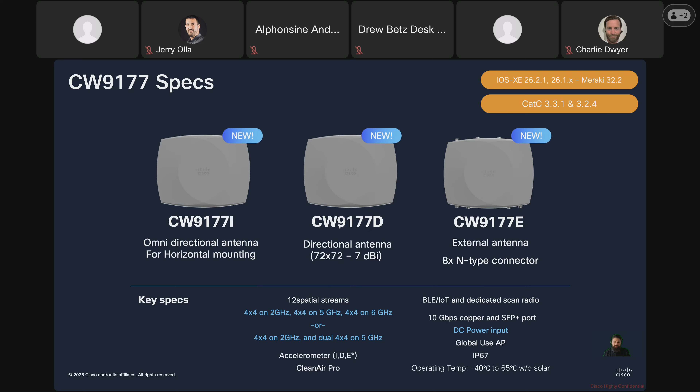Something I get a lot when I talk about these is, hey, that looks a lot like the 79F, our stadium access point. Yes, it does. It is quite a lot smaller. So I took a photo here on my living room floor the other day. The 79F, our stadium large public venue access point, is substantial in size, smaller than the older one. But here, in comparison with the 74 and the 77, you can see that the 77 is actually quite a lot smaller. And we're pretty happy with how much heft we packed into this platform.

In terms of the antenna portfolio, as I mentioned, we launched 2 new antennas. The directional patch antenna, so 88 by 40, so nice asymmetrical patch antenna here, 8 dBi gain. And as I mentioned, the accelerometer is actually in the antenna element itself instead of the access point, which is great. And similarly, if you want omnidirectional coverage, you have an external access point, the 77E.

We have a new bell or dome antenna, which is tri-band. You can also do dual 5. Yeah, ready to go. So this is tri-band and, of course, omnidirectional here. Few quick highlights here. As we always spend a lot of time thinking about how we can make this easy for you guys and your installers. Everything on the back of the antenna, it's color coded, right?

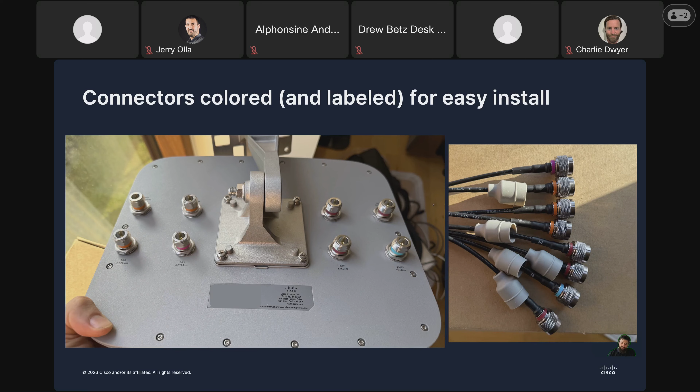As I mentioned, this access point does support our ultra-reliable wireless backhaul. It's a bit of a mouthful. But in short, this means that you can now have one access point serving up not just regular 802.11 clients, but our industrially grown proprietary technology that gives you high-speed roaming. It gives you extra resiliency. We can send frames over 2 different paths, so multipath transmission and reception. All of that is on the 77 from launch.

So don't just think of this as a quote unquote outdoor access point. Start to think of this as kind of a lightweight industrial access point where we can support the guy with his iPad at a loading dock, whilst you also have a fast roaming robot driving around your lumber yard or your warehouse. All of this can be supported on just one access point at launch.

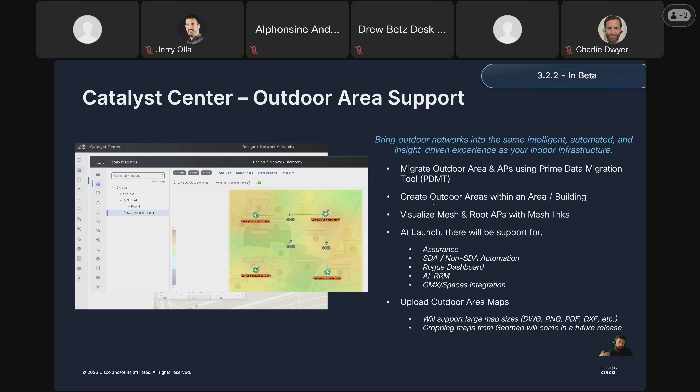Also, and this has been a long outstanding ask, so I wanted to give it a call out here. Shout out, Catalyst Center does now finally have the support for outdoor areas, kind of like Prime did. And some of the features that you know and love from Prime, visualizing mesh links, all that good stuff is now on Catalyst Center, so kind of a perfect companion for the 9177. Of course, this access point is supported both on the controllers in Catalyst Center and on Meraki. I should make sure to mention that.

And with that, you know what? This is available in planning tools like Hamina today. So I'm going to hand it over to Jerry to give us a demo of what Hamina looks like today and hopefully show us a bit of the 77. Before I do that, I will give one call out because that mistake is on us. In Hamina and other planning tools, there is a little bit of a mistake in the 77D data. We're working on fixing that, but that's on us, so don't hold it against them. Yeah, and with that, I'm going to pass it over to Jerry.

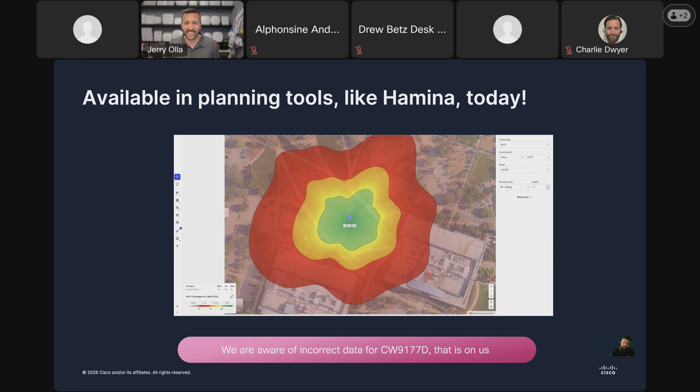Awesome. Appreciate it, Nicholas. Thank you for the nice warm transfer there. Let me get my screen share going here. And for those folks on the call that are not familiar with Hamina, I'm Jerry Olla. I'm over at Hamina Wireless here. I'll give you just a real quick overview of what we do here at Hamina. And really what we're all about is providing tools for folks that are designing, deploying, managing wireless networks. So one of our centerpiece products here is going to be the Hamina Planner. That's a browser-based network planning application.

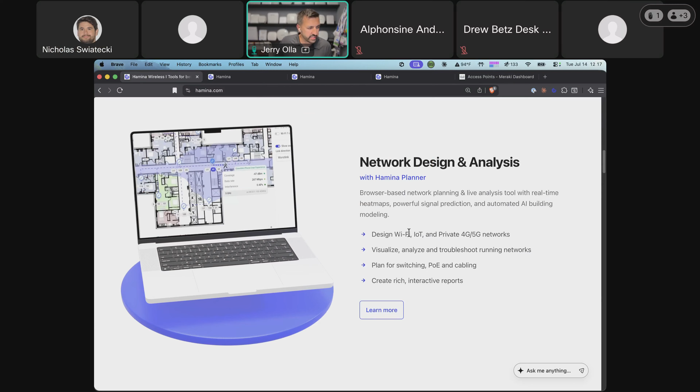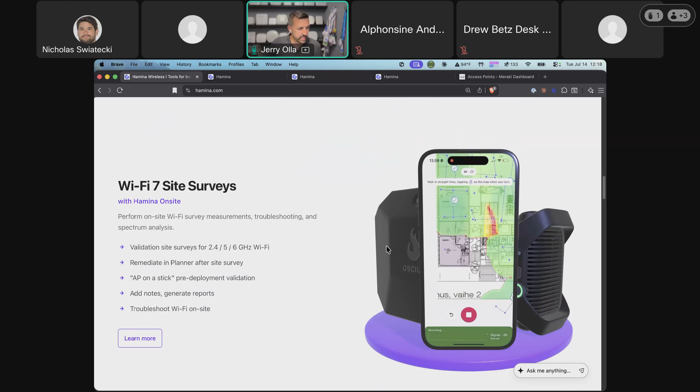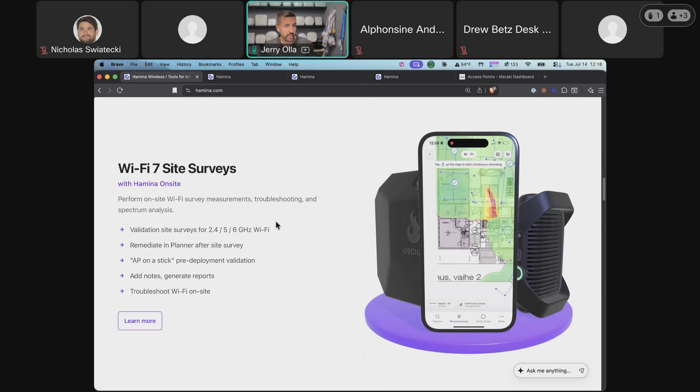And I'll do some demos for you here to show off some of the stuff that Nicholas was talking about in the Hamina application for the planning side. But also one of the things I wanted to focus on is some innovation on the site survey side, and in particular on the Wi-Fi 7 front with the site survey piece. So why don't we start with that side of it, and then I'll show you some other things here in the planner application.

So I'm going to see if I can get my screen share going here and show you what this looks like. So I've got my iPhone here. Notice how what is missing is I don't have any cables connected. I also don't have any straps or anything like that for carrying around any kind of Wi-Fi measurement devices. So this is one of the latest and greatest as far as Hamina goes.

We've got the ability now to do these site surveys without needing any cables or straps or anything like that, even to do something like a Wi-Fi 7 survey, Wi-Fi 6. So what I've got here is the Hamina Clip. And this is our new Wi-Fi measurement device. We also have its big brother, the Nomad.

Both of those are Wi-Fi 7 capable, but I wanted to specifically show you the Clip because what I can do here is I can just tap the connect button here, and just by having the Clip near the device that I'm surveying with, in this case it's just an older iPhone, but it'll work with an iPad, that kind of stuff as well. And now I can do my site surveys using the device here.

So I'm just going to show you the on-site application here. It's already doing some active testing of the network that I'm connected to. I can see here that I'm connected on 6 gigahertz. So this is using the radio in my survey device to do that active testing,

which means if we need to test a Wi-Fi 7 network and we want to see the true Wi-Fi 7 performance of the network, as long as our survey device is a Wi-Fi 7 capable iPhone or iPad, we can now use that device to do the active testing, while all the passive measurements are coming from the Clip device. And no cables or straps or anything.

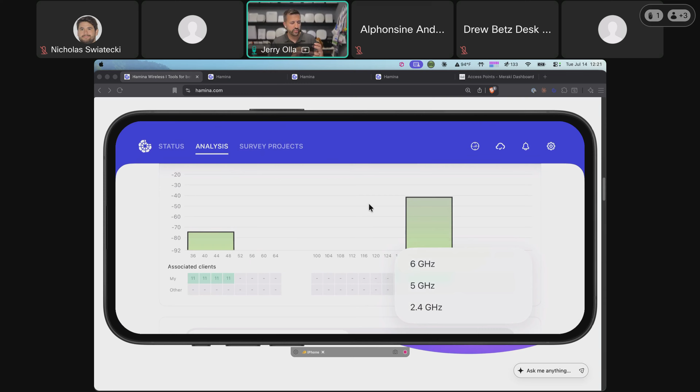Here's 6 gigahertz, 5 gigahertz, how many clients are connected on each channel, the health of each channel, like utilization. If we go to 2.4, you can see my environment is actually pretty boring, even though, again, I've got all these APs sitting behind me. There's not a whole lot actually going on in my environment right now. But yes, then the big thing here is we can do all this site survey with that data, right?

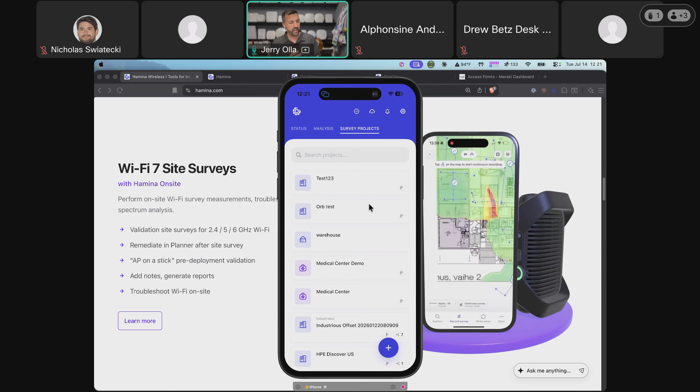So I can go in here and I can pull up my projects and I can do a site survey. And I do have a project already pulled up here, but let's go ahead and put that aside for right now. And let's look at the planner application here to show you some of this.

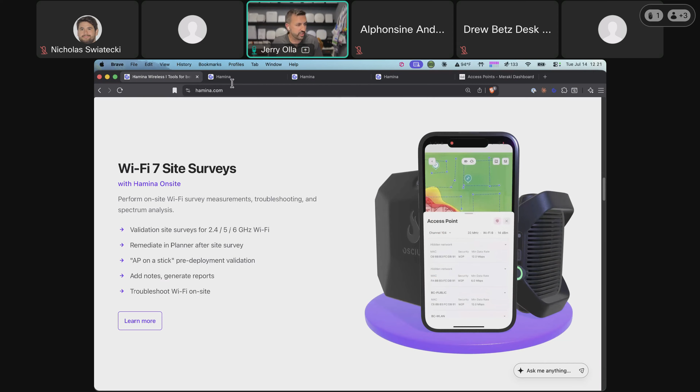So one of the other things I want to show is the Hamina Live integration that we have directly into things like Catalyst Center, into Meraki, to be able to pull this rich detail into Hamina, or vice versa, go from Hamina into those platforms. So we can help with both sides of that.

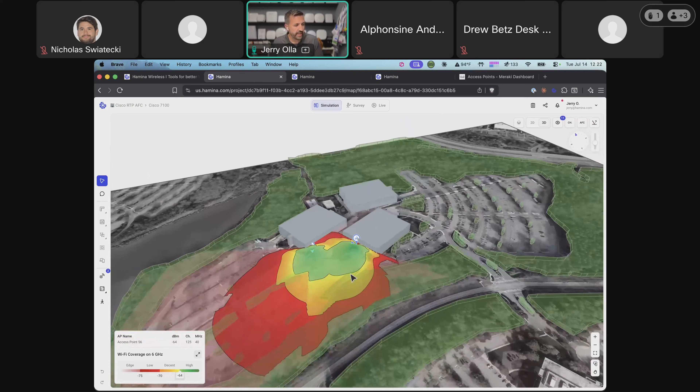So I've got a project already pulled up here, and since this webinar is particularly focused on Wi-Fi 7 and outdoors, I thought it'd be fun to maybe do a little design together here for an outdoor environment. And I've got this environment modeled up. If anybody's been to Cisco's offices in North Carolina in RTP, you might recognize this kind of aerial view of the space and buildings and parking lot here.

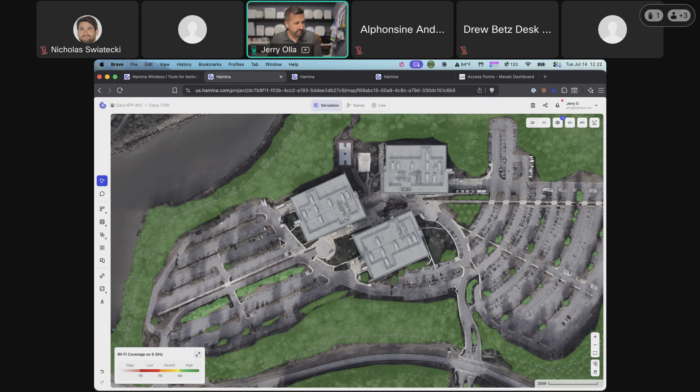But yeah, if we take some of those new access points that Nicholas was just showing off, and we want to play around with some design, I'm just going to remove these off of here for a second, and we're going to look at a few different things. So I've already modeled up this environment. When it comes to some of the trees and foliage, you can do a lot more detail than this, but generally this is going to be enough if we're just trying to design for maybe coverage for the parking lot and some of these outdoor areas. You get like a basketball court back here.

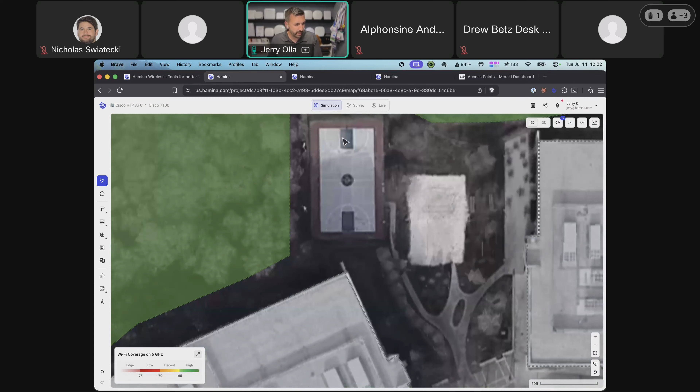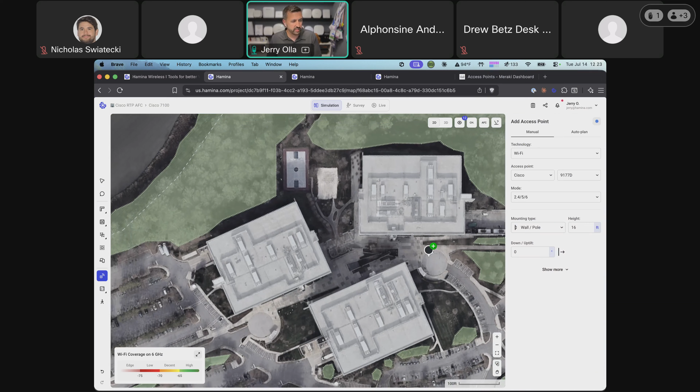So if we want to make sure we've got coverage in all those kind of areas, this is usually going to get us where we need to be. Obviously, if you need to cover much longer distances and do point-to-point links and things like that, we're probably going to need to model some other things into that environment, like terrain and elevation, which we can also add in there as well if needed.

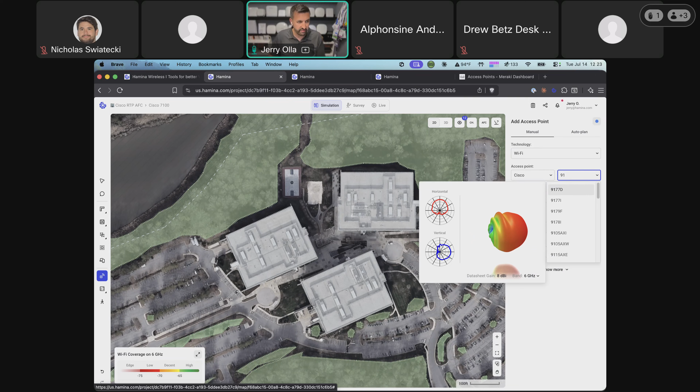But in this case, let's just grab some of these new fancy 9177 APs. You can see we've got these in Hamina. I can filter down to just showing the 3 different 9177 models that Nicholas was just showing in his slides. Let's start with the indoor integrated antenna, omnidirectional, and place that maybe on the side of the building here. We can see what that coverage is going to look like with the default configurations on 6 gigahertz.

If we're in an area where we can utilize 6 gigahertz and things like standard power, we can adjust those kind of parameters in here to represent and model those. We also have an AFC function built into Hamina. So if we input the GPS coordinates of where this site is actually located, it will go out to a real AFC provider and provide those values of what we can actually set our power levels to.

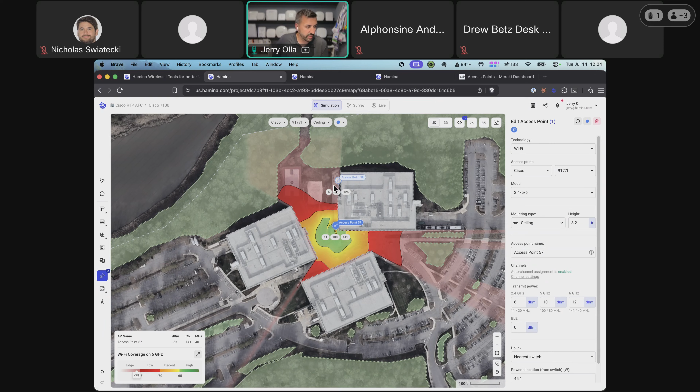Especially if you're in the U.S., Canada, or Mexico, where we have those AFC coordination services that we can use in our design for standard power planning. But here, using these integrated antennas, we can kind of see what that looks like.

Mounting these ceiling mounted, or in this case, like wall L mounted, you can change those mount types to represent that. If we want to put these directly on the wall of the building and face them out, or put it on some type of a bracket, we can simulate those kinds of scenarios, rotating the face of the access point to simulate those things.

But once we've maybe done our design, let me just do a couple more things here. Let's do a 9177D, and I'm going to put this one over here on this side of the building. We're going to try to cover this parking lot out here and run through a quick scenario. So let's say we put this out here. Again, I'm showing on 6 gigahertz, and we can see what that coverage kind of looks like.

But maybe if we're wanting to get connectivity and good coverage all the way to this end of the parking lot, obviously that's not going to be a great user experience. We can even model in here a Wi-Fi 7 capable client. We've got different types of clients we can simulate. So let's simulate the latest and greatest iPhone that's 6 gigahertz capable, Wi-Fi 7. Maybe they come out of the building here and we simulate what that user experience is going to look like as they get across the parking lot.

And this thing actually will cover plenty far. You can see it's not a great user experience — we're all the way down to -76. So not going to be a great user experience, but it is able to actually cover all the way out to the edge of the parking lot with that 6 gigahertz coverage, just not really provide the greatest user experience. So let's see if we can improve that.

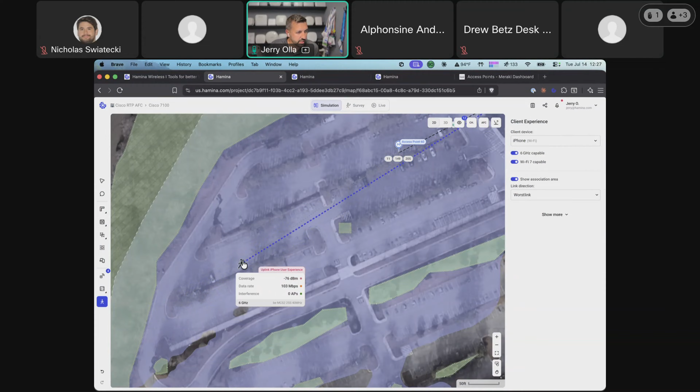And yeah, see, there's plenty going on in chat there.

Any questions or anything come up that we should address at this point before I change topics? No, I think you're good.

One curious question about importing Ekahau surveys. Is that something possible?

Not officially supported on the Hamina side, but what we do officially support on the Hamina side is the ability to import and export to multiple APIs, as well as this open intent file format.

So if I go to import here, you can see we do have this 'from file' option, which is an open standard. So if you convert those Ekahau files into something like an open intent format, then yeah, we will absolutely ingest those into Hamina.

Whether it's right now it's simulation only, but very soon we're going to be expanding that open intent format. They've updated the schema now to also support survey data, so that's coming very soon as well, where we will import that from any platform that you did a survey from. As long as it's in that open intent schema format, you can import those projects into Hamina.

Very cool, that's great. And I love that mesh example you gave, Jerry. That was very cool to see.

Yeah, nice. And that's a good segue on the import export side of things to the last topic I wanted to cover, the live integration piece, where let's say once we've finished our design here, we can either export this information right from Hamina.

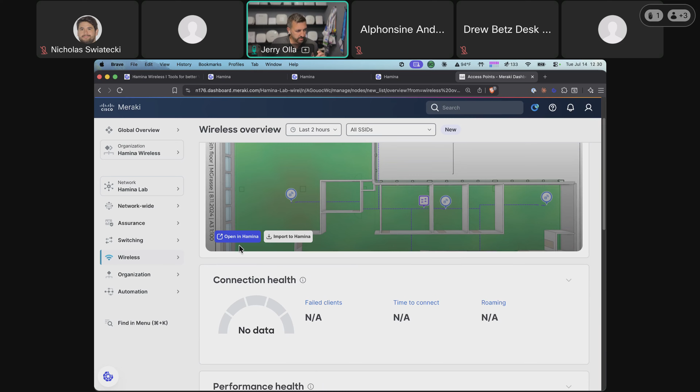So I've got my Meraki account pulled up here. You can see there's some different knobs in here than you're probably used to seeing, like open this project in Hamina or import to Hamina.

So if I don't even have this particular site here, which I've got our Hamina lab selected, I can say import that site directly into Hamina, and it will go with just a single click, pull in all that data from Meraki into Hamina. So in this case, just a single click now.

This is using this Chrome extension to pull all this data in. And so you can see by just having this Chrome extension in, and by being logged into my Meraki account and my Hamina account, it allows those two platforms to very easily talk to each other.

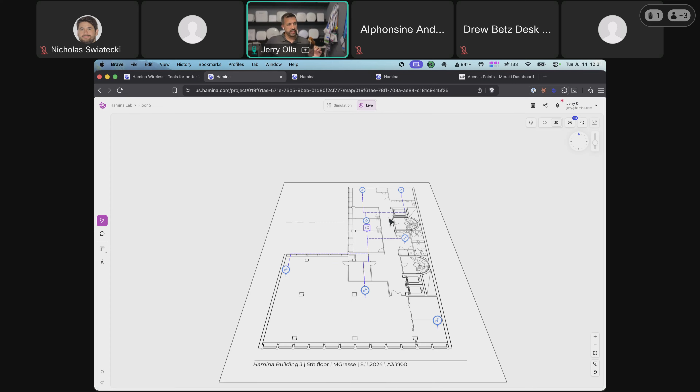And now all of this kind of work is happening behind the scenes, right, to build up this model into Hamina. So a few seconds ago, Hamina didn't know anything about this site, and now it's just built this environment and model of this site from the data it got out of Meraki, including these live APs, right?

So when I click on this AP, this is an actual live deployed AP. This is actually a site over in Europe. I can see all the details about how each of these radios are configured. We got some 9166s over there.

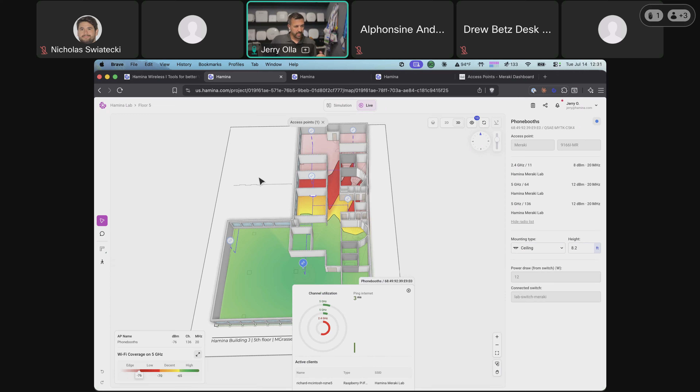Let's just see if we've got any clients. Yeah, we've got a bunch of clients connected to the network. So if I select a particular client, it's going to show me details about that client, and it's going to immediately start doing some active testing of that client.

If I want to seamlessly go back from Hamina into the Meraki side, I've got a little button here that'll take me right back to the Meraki dashboard. The cool part is it zooms right into that client I was just testing in the Hamina side and gives me all the historical context. So Hamina live gives you the live analysis and troubleshooting tools, and going back into Meraki we get additional context about what's been happening with that client for the last day, the last week. So we can seamlessly go between the two platforms.

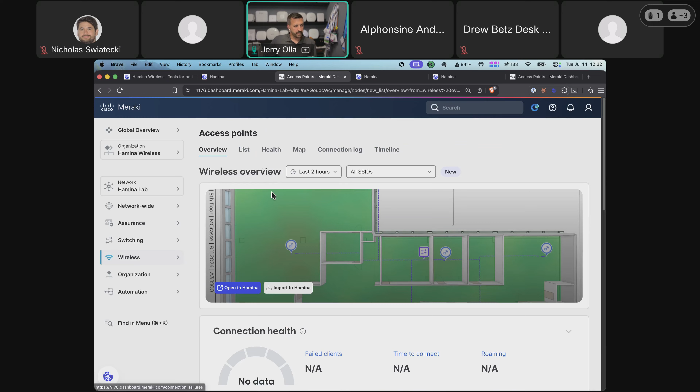I can also do the same thing where if we go to the wireless side here and go to the overview of this particular site, and then down to the client level details, we can zoom in from there to see that. So we can go from either side of this.

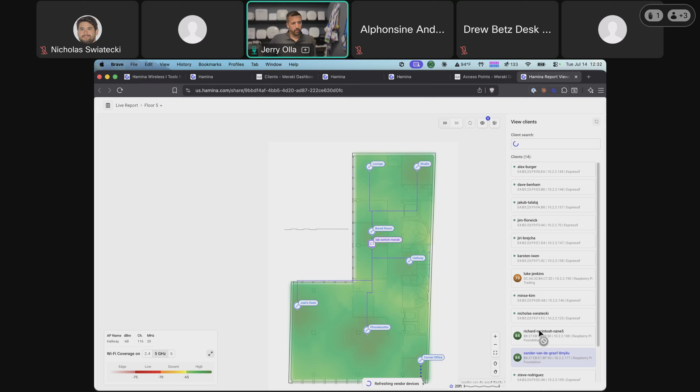If I go to the client side, you'll see we have this same kind of detail here, where I have the little Hamina button now, where I can click on that particular client. Same thing, it'll pull up that project and select that same client we were just looking at in the Meraki side. Now we're doing all sorts of connectivity testing with that client, getting all the active information about it.

This one actually happens to be running the Orb agent on this client, so that gives us additional insights beyond what we get from the Meraki side, which is more from the infrastructure side. We also get the user side of it - what does their experience look like? We get the downlink and uplink RSSIs, both directions, to see if there's any mismatches. It does a speed test - all these active tests we can now run against these clients to give us more insight for troubleshooting.

That is pretty much everything I wanted to cover with the time that I had here, unless there's any other questions in the chat that I should cover before.

Jerry, we've got a lot waiting for you. So I think the best thing is, how about everybody - thank you so much for submitting your questions. Jerry will spend some time answering those for you because I think there's some great questions in there for you, man. Cool, awesome, sounds good. Well, thank you so much, this was excellent. I know I learned a lot. I was particularly impressed by those mesh links - I thought that was super cool.

There's so much there. So now, why don't we switch gears? We talked a lot about the current state - how can I make my Wi-Fi 7 network amazing, right? But let's think about the future state, because at Cisco we're always invested in future protocols, future specs, making sure that your voice is heard in standards bodies and establishing the future.